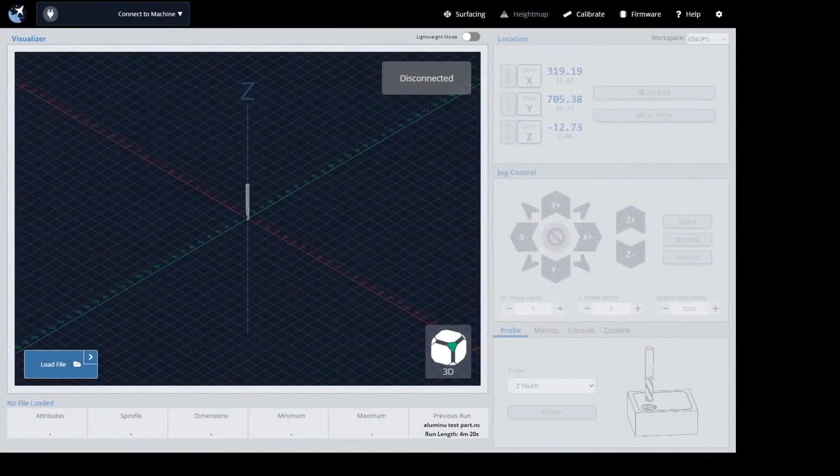So this is the most current version of gSender right now, 0.6.9. This is the full version of it you can see here. Let me just bring that to the middle.

Actually, let's see if I can get this looking how it should look. I want to make sure that I can see you guys as well. Doing a little bit of adjustment here on the fly. Yeah, so let me first switch over here, just to remind you guys before I get into this. Where's my mouse going? Okay, give me a second. I'm sorry to delay the stream, but my mouse has disappeared. I don't know where I'm clicking. Oh, there we go. Okay.

Here we are. So just to remind you guys about gSender, where you can download it, stuff like that. gSender is available on our website. We have put a lot of time and money into it, and a lot of development time. It's been under constant development for over 6 months now, but we make it available for free. If you just go to sienci.com, which is our website, you can also go into the resources here, and you'll see gSender. And if you click on that, then this page will load up for you.

And actually, thank you, Stephen, for the tip off that my links were a bit out of date, but now the links are good to go.

You can see why you might choose to use gSender. A lot of what we try to push through the development of gSender is a clean design so that it's easy to use no matter your experience, that it's also bringing additional features to the plate. And we also are working to make it run more reliably and effectively on larger files and lower powered hardware, more so than other G-code senders work, while still giving you those features. Feel free to click the drop down because we kind of keep track of the full feature list there if you're interested. There's an FAQ here if you've got some questions about it, which I think answers a lot of people's questions.

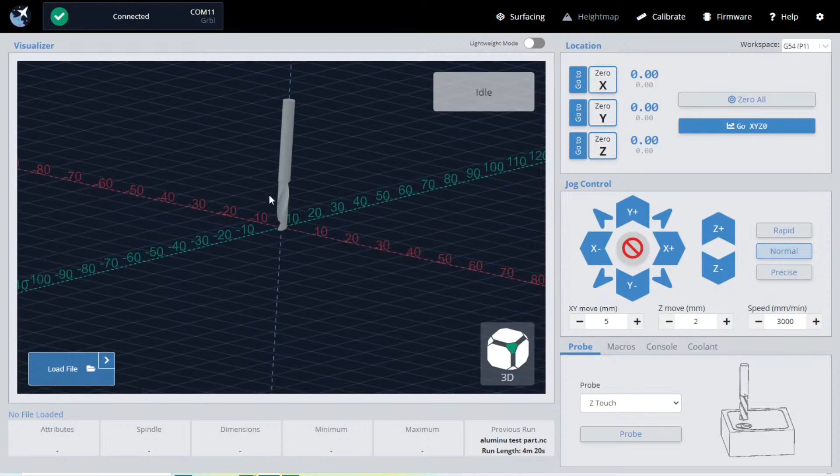Some of you might not have known this is a bit of a 3D view. You can always look at it using this little cube at the bottom. But you can also scroll in and out, left click and hold to rotate, and right click and hold to pan across.

Let's see if I've got any parts to load up. There's a lot of parts that I can load. Here's a mock part that I can load up here. That was just my recent files.

Seems like you guys can't see the load prompt, but when you click load file, you get a little window that pops up, and that allows you to navigate through to the file that you want to run.

So for instance, let's see if I can find my Starman here. I'm sure he's got to be somewhere on the computer. Oh, I guess not. No Starman.

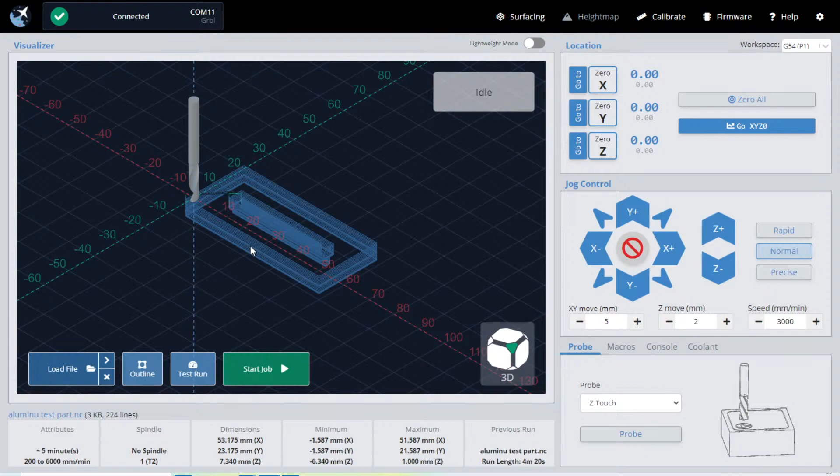Let's load up some text here. Okay, Steven, I will stop then.

And talk about the workspace dropdown. Oh, as I get to it.

Okay, I'll continue going. Colby says, neat on the fix for jogging with the arrow keys for the y-axis. Z.

Oh right, Colby, I remember that reported issue. I thought we had fixed that, but I guess I'll have to retest it because I can't remember exactly what your setup was with the shortcuts. I'll have to open back up your message and check that out again. If you haven't tried it yet on the newer version, please do. If you don't have 0.6.9, please give it a shot. I'll send you a message about it after your stream, and if it's still not working, I'll follow up with you.

Okay. So okay, I'll continue on. No other questions? I'll continue on.

You can see the code visualization happening here, and you can go and check it out if you'd like to.

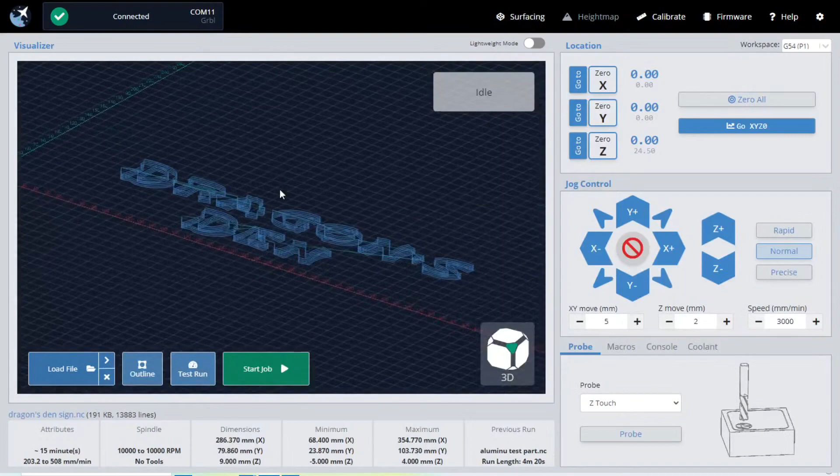Okay, and by the way guys, I'll let you in on a bit of a secret. gSender, the next version isn't going to be out for maybe 3 to 4 weeks because we're doing some more restructuring of the backend code, since we think we can make some of the processing happen even faster. I'll give you guys more updates in the weeks to come on that.

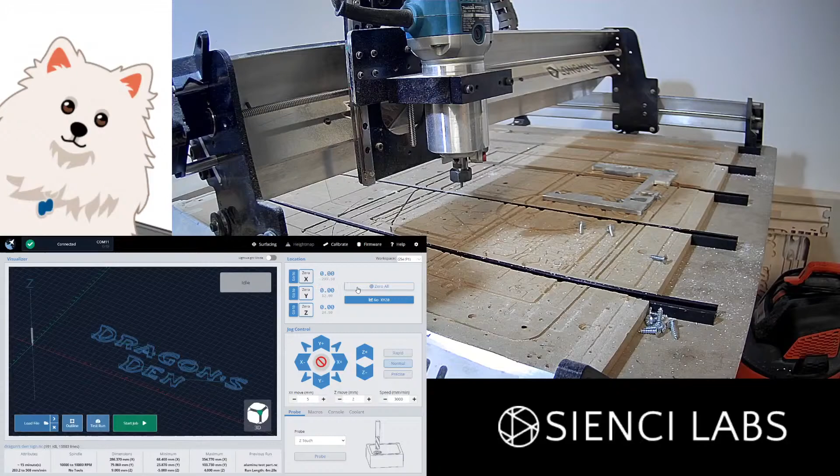In any case, I'm going to just move my machine to an appropriate spot here. Let me switch my view so that you guys can see. I'm going to be running the outline here. Just giving myself enough space to work with. And I'm just going to re-zero here and then run the outline.

So you can see that it kind of moves up, and it's going to be aiming to basically outline the entirety of the G-code. Now this is pretty handy, this is one of the new features we've installed. It's handy because it's going to show you what the extents of your cutting job is in real life.

If you've got your bit hovering over your material, you'll be able to see the view of where your cutting area is going to be. That might be handy if you need to place something more precisely, or make sure that things like clamps might be avoided. Although obviously we're not outlining every single individual letter here, it's just an overall outline. But there are some aspects where that could be very useful.

Also, you guys know that we're working on our laser module, which is soon to be released. So if you're loading up G-code jobs for the laser, that's something else that would be useful to outline with your laser before running the cutting job or the engraving job.

One thing to note is that right now the outline is being based off of the 0 point, and that's something some users have reported has kind of crashed down unexpectedly for them. So we're going to take another look at seeing if maybe we can substitute some absolute movements for relative movements so that stops happening, and that should eliminate that issue.

Oh, I just realized I should probably be full screen here so you guys can see that a little bit better.

This active signal also applies when you're actually running jobs, so that can enable you to keep tabs on if your spindle or your laser is on or off while you're running a job. It doesn't just apply to doing manual control. That's something else that's beneficial.

While I'm at it, there's also coolant control here. This applies to the coolant pin on the LongBoard, and does the same thing where it sends the command to turn on and off. Got a bit more of a delay to it, but the reason why the mist coolant button doesn't work is because Grbl doesn't normally support mist coolant. But the flood coolant is the one you want to click to turn on the coolant pin, and then you can turn it off.

Okay, so hope that was all clear enough.

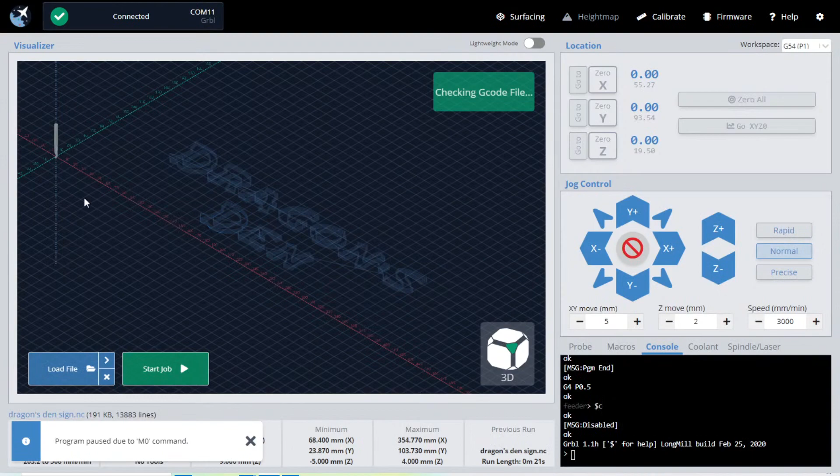I'm going to also show the test run. I'm just going to zero out again. If you run the test run, it's going to go through and show the movements of the bit. You can see the G-code running in the console here. And it looks like there's a bit of a bug here where the bit isn't moving, but that kind of just runs through the whole G-code.

The main purpose of the test run feature is to tell you if there are any issues that it's running into, and if there are issues, they'll pop up at the bottom here. When I test run this file, it came up with info that there's an M0 command that's pausing my program, and that's why I have to resume after I first run the file. This prompt here, you can just exit it to make it go away.

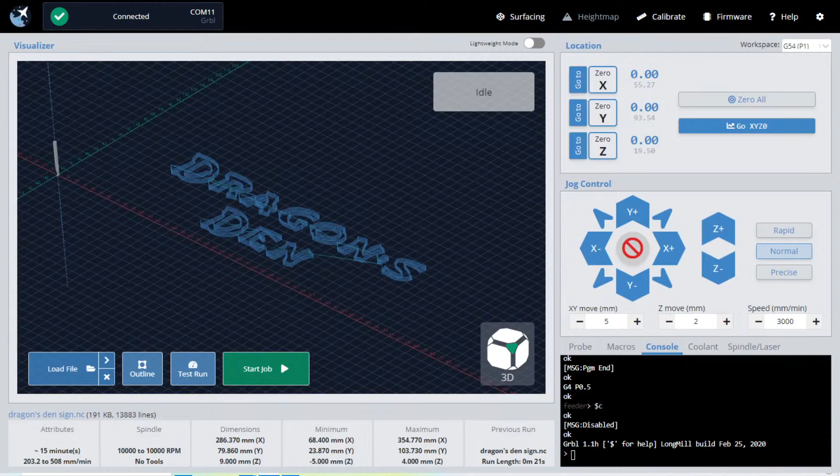Does the exclamation mark show on the UI if the tab is changed?

That's a good question. It doesn't right now show on the UI, it's only available inside of the tab. So that's a fair point actually, Stephen, that perhaps we should consider seeing if we can have a notifier displayed elsewhere so that it doesn't disappear. But as of right now, it's specific to the tab to see when it's active or not active.

The benefit of having the active indicator is beneficial when you're running a program, but the reason why it's specifically here right now is because this tabbed area is used specifically for manual control. Our assumption was that if somebody is using manual control of their spindle or laser, it's probably because they're troubleshooting and something has gone wrong and they're trying to see what it could be. So we thought it would make sense that if you're clicking laser on, you have feedback that yes, based on the software side of things, the laser should now be active. Same for the spindle, it should now tell you yes, the spindle should be active. That way, if your spindle in real life doesn't turn on, but it says it's active here, then you know there has to be an issue with something happening in between, but it's not a software issue essentially.

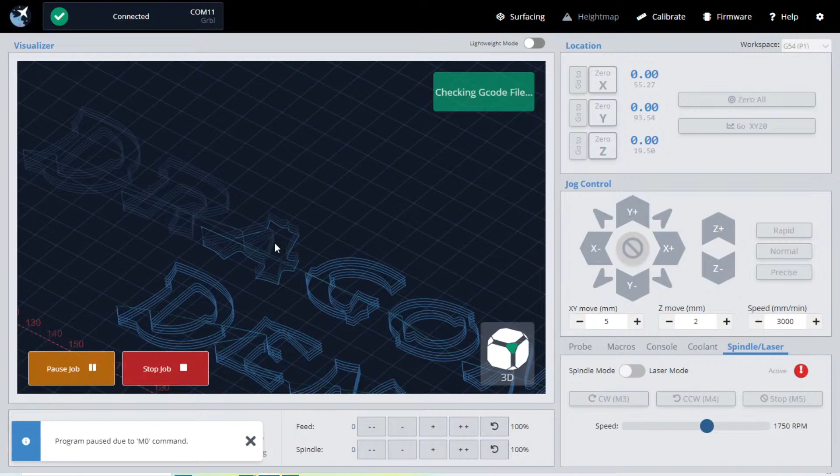Well, if they were fonts that were stacked on top of each other and you couldn't see it normally, then you would be able to see that. Because if you're running the test run, you can see how the letters slowly gray out here. So if you're watching through the test run and you see the letters gray out, but there are more letters that aren't grayed out underneath the current letters, then that would be a good indicator that there are two sets of letters on top of each other.

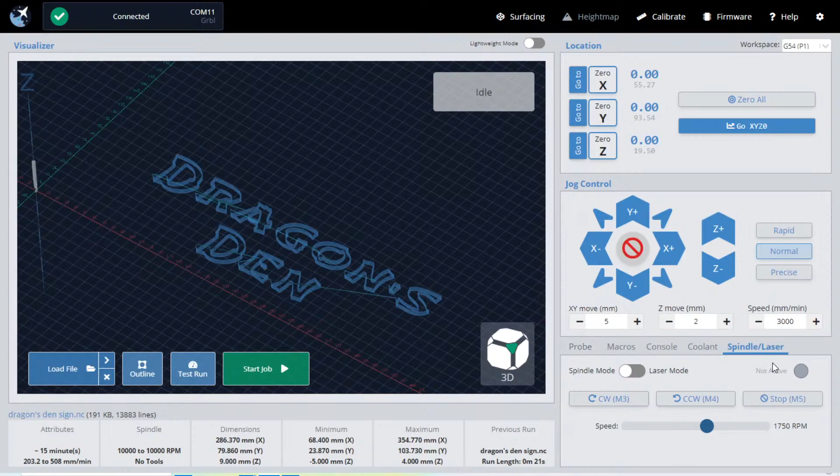Yeah, it is a bit of a safety issue. We do want to make sure people don't look into the light while they're using the laser, and your hands are clear when you're running the spindle. So it kind of has a dual purpose, I suppose. I'm pretty sure the laser module also has an LED that turns on when the laser is active, so that's kind of your caution there. But I think it's something that's valid to consider for the future.

Okay, let's see what else I want to do here. I'm not going to address every single button. I'm going to try to address things in the order of someone who's not used gSender before. I know I've tangented a little bit, but we started off by connecting, we loaded a file, we've navigated around that file, and you've seen what these buttons do here. Obviously, the start job button starts the job

as you would expect. But let's pretend, for example, that we haven't set the 0 point here yet. What would we do? Well, we've got our locations here, and it's at the 0 point. You can see we've got the jogging arrows here, as well as this little cancel. The cancel you only really need to use if you accidentally move too far a distance and you want to stop it without completing that movement. These movement keys correspond to the distance that it's going to move when you click that key. This is for the XY, and this is for the Z. And this is the speed that they're going to move at.

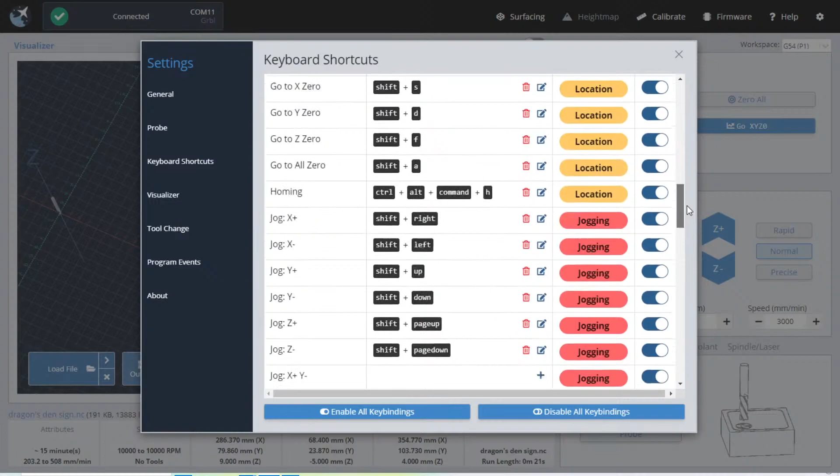You should try to make sure that most of the buttons you assign as shortcuts are ones that are going to be hard to hit accidentally. But in any case, these three buttons on the side here are what I call jogging presets. They change these values down here to preset as either rapid, which moves further distances faster, normal, which is in-between, and precise, which moves smaller distances slower. And this can be used for the jogging. You can see that I'm moving a very short distance here.

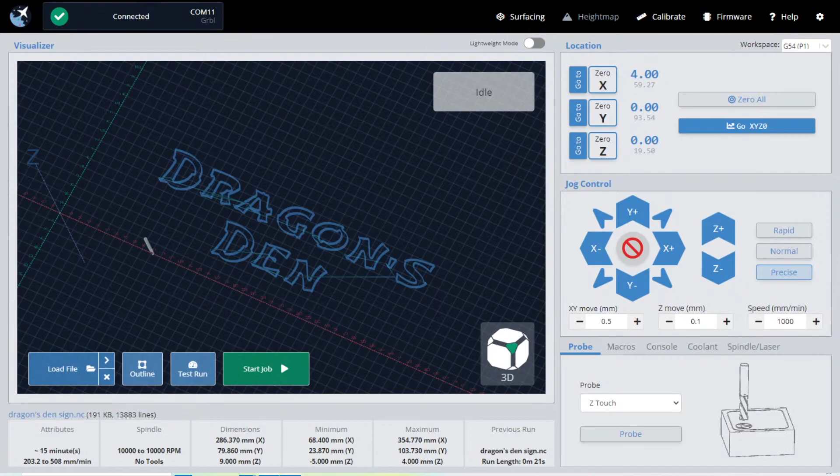Looks like there's a visualization bug, though. But you can see that I'm moving a very short distance on the actual video camera if I switch over, by just clicking these. And I can also use my keyboard as well. Now, if I was using rapid, for example, where it moves 20 millimeters, or let's say I increase this to 90, and then I move and want to stop, I can hit this cancel here to stop that movement, in case I accidentally went too far. But in that case, we're still only talking about single clicks.

The jogging in gSender is also set up for continuous jogging, where I can click and hold in any particular direction. I'll just go in normal. I can click and hold, and as soon as I let go, it'll stop moving. So I can click it, and it'll move. Oh, that's interesting. I'll mark that down as a bug, I suppose. So I can click it, and it'll move the 5 millimeters, or I can click and hold it, and it'll continuously move until I unclick. And the same happens for the keys. I can press it, and it'll move that distance, or I can press and hold it, and it'll keep moving until I let go.

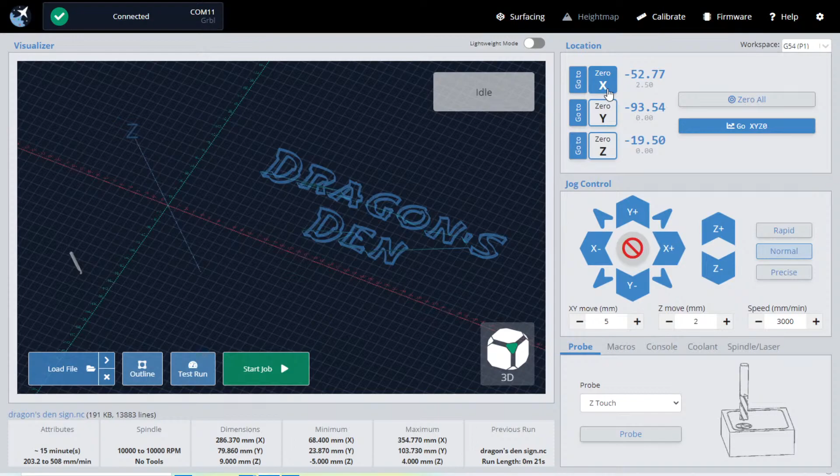I'll quickly show off some other buttons. Obviously, the bit's over here. Right now, the bit's over to the left side, and the 0 point in comparison is up and to the right a bit more. And so I can say, oh no, I don't want it to be here, I want that to actually be zeroed. So when I zero it, you can see it places it at the 0 of the X, which is along the green line.

Or if I say, yeah, I am at that position in relation to my 0, then I can just decide, hey, I want to go back to where my 0 point is, and I'll hit the go to, and it'll move back to that point.

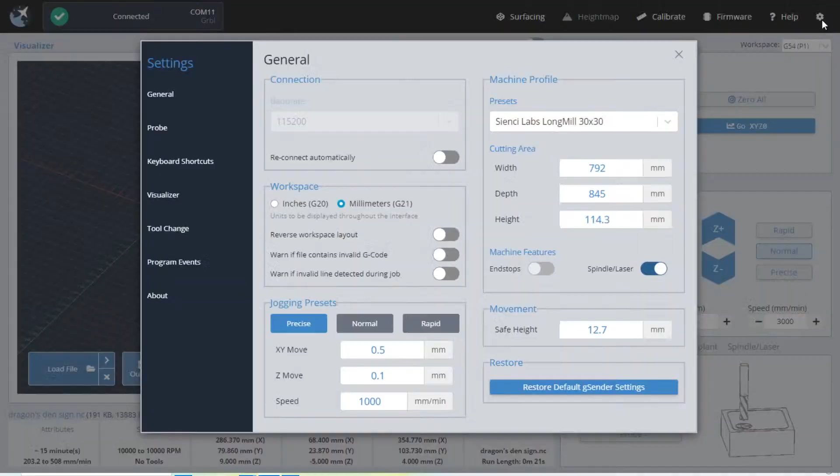Now, if you want to make sure that you're not colliding with things when you're moving around or using the go-to buttons, there's an option here for a safe height, and that safe height will allow an upwards retraction before it moves, and then a downwards retraction again, so that you don't have any collisions with anything.

That's still something that we're trying to make sure works across all the new features that we've implemented. And we might perhaps draw upon that specified safe height when the outline is run as well. So let me just catch up on the chat. Yeah, Dallas, the outline button is a new one. It's just come out with 0.6.9. Feel free to give it a try, but as I said, give yourself a lot of extra Z height to play with so that it doesn't accidentally run into anything.

As you guys know, gSender is still in active beta, and what that means is that we are working as quickly as we can to bring new features and new improvements to the program to you guys. But also in those 2-week development cycles, we're trying to do the best testing we can on our end, but there's still things that fall through the cracks. And so what I would recommend is that you guys... yeah, don't worry about it, Steven. It's something that...

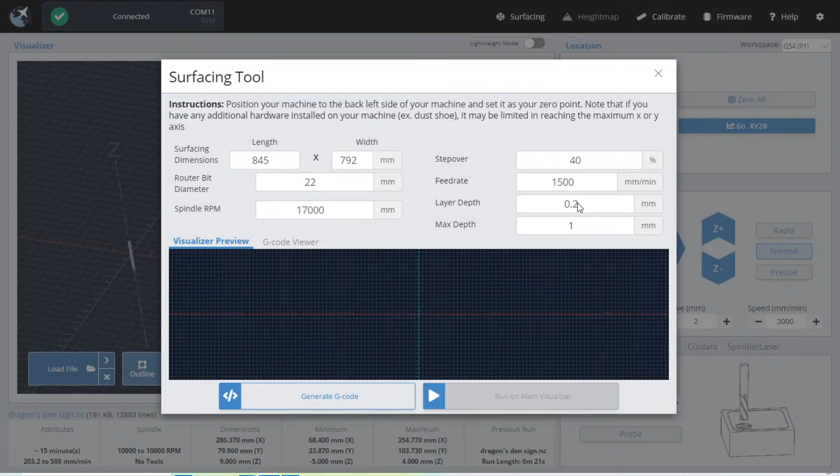Any updates on surfacing prior to... oh yeah, I'm pretty sure it was fixed. Yeah, you can now select this and put in values smaller than 1 now. That was something that was fixed with 0.6.9. So enjoy. Also, we fixed that issue where if you entered in custom values, when you exited and came back to it, they would be gone. Now they remain.

Okay. Okay, where was my train of thought here? Oh, right. I was talking about gSender being in beta.

The plan with gSender is that we're going to be continuing development of beta for likely the next 2 months. And that should allow us to get to the point where we will have the entirety of the feature set sorted out in terms of any bugs or any behavior that is unexpected. And at that point, we will be releasing gSender under version 1.0.

As soon as that happens, all of the download links and all of the other documentation will be surrounding gSender 1.0. At the same time, we will continue doing development on gSender, but separate from the 1.0, where it'll be more of a development branch. And our aim is to make it so that in the settings, you can choose to toggle between getting updates for the development branch or not. And by default, it'll be turned off.

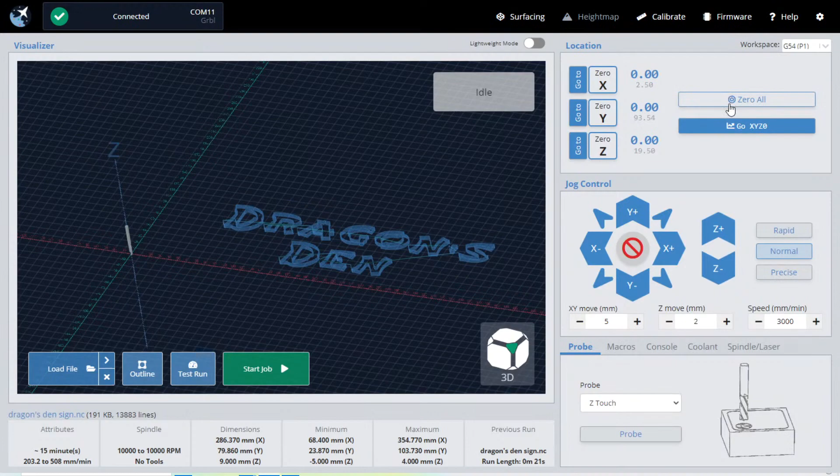Obviously, you've got the zeroing for the axes independently and the go-to for the axes independently, and then you've got the zeroing for all and the go-to for all. There's also another feature which is still a bit developmental because many people don't have limit switches for their LongMill. But you can see there's a toggle here for end stops. Basically, to enable this feature, as of right now, you actually have to go in and turn on end stops here in the firmware tool.

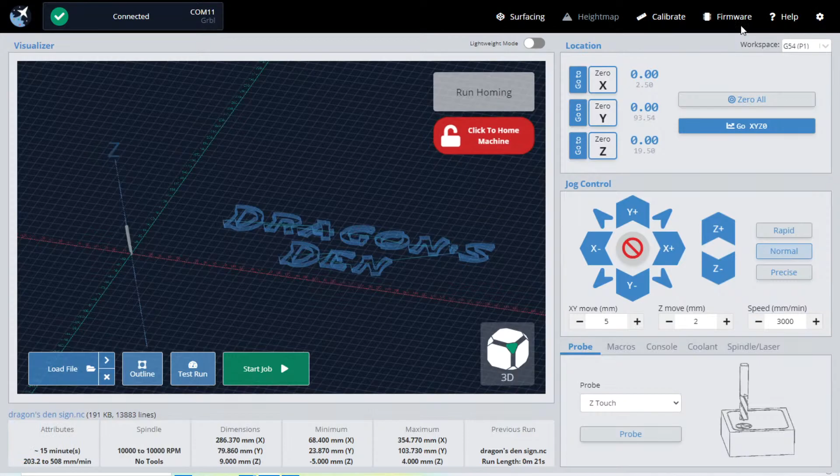And so we have to be able to turn on the homing here. And once you do that, it's going to want you to home the machine. But you'll also see that this toggle now becomes available. And once you toggle that on, it's basically going to give you some additional buttons here, including the homing button, which obviously you can send a homing command through the console as well. But also these quick location buttons.

And you guys won't have to worry about this, but by default, when you download gSender, the preset is for the LongMill 30x30. And it comes with the appropriate width, depth, height of the machine, as well as the width, depth, height of all these other machines that we have gone out and collected ourselves.

That took a long time, by the way. That took me like a whole day. Anyway,

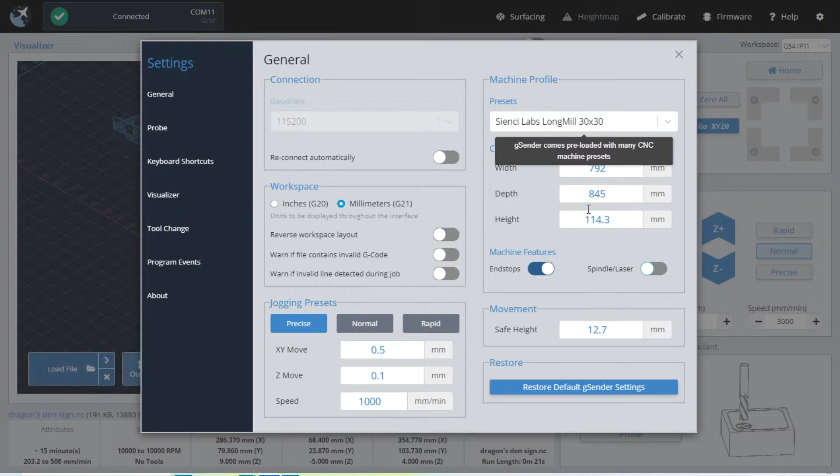it uses these values here for these buttons here. So when you go and you home the machine, which I won't because I don't have any limit switches available right now, these buttons will be made available, and they are actually quick movements to the four corners of the machine. And that's just like a bit of an extra perk of having homing switches or end stops on your machine. So I'm going to turn this off though, because I can't actually clear this.

Steven, I'd like to have both installed rather than choosing one over the other. Yeah, that's fair. Maybe we can have it so that they're both happening independently. I'll definitely consider that in the future. It's something that we haven't actually started working on yet, being able to choose between the two, and so if we find that not having to choose between the two is actually easier to implement, then perhaps we'll just go down that route instead.

So, Steven, I'll address quickly the workspace that you were talking about. Some of you might not know this, but when you're using the LongMill or any CNC machine for that matter, you can set up multiple workspaces, also known as work coordinate systems. And essentially, these different work coordinate systems are basically different 0 points that you've set. So, for instance, you'll notice that right now in gray, these numbers are different than the 0 numbers. And it's because these gray numbers are actually the quote-unquote machine home.

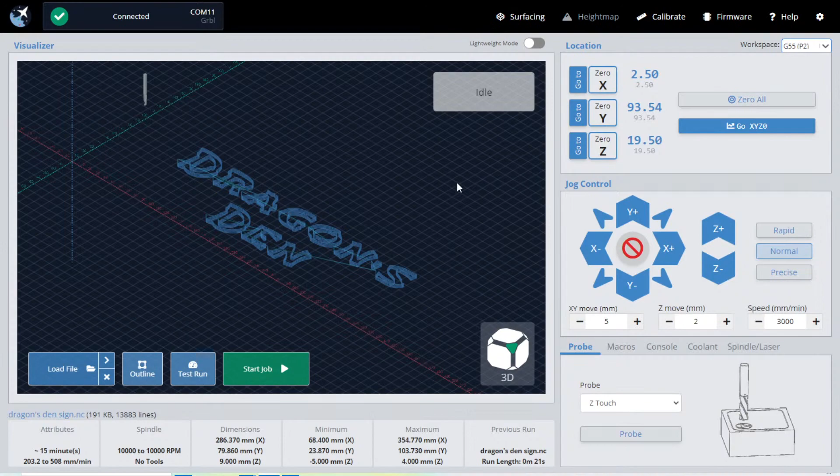I'm at the workspace G54 0, 0, 0. Now, some of you might not know this, but anytime you're using basically any G-code sender, by default, you're working inside the G54 workspace. You're not working within the machine workspace. And so if you want, you can always just switch to another workspace. And you'll see here that in my G55 workspace, because I haven't altered the 0, its 0 point is still at the machine 0 point.

Though obviously, if I wanted to, I could say, oh, this is my 0 point here, right? But now that I've moved it and set my 0 point, if I now toggle back to G54, you'll notice that in G54, the bit is offset by that movement that I just made. You guys see that? And if I go to G56, it'll also be the machine 0 back up here.

And so you can see how this would be useful if you're wanting to keep track of multiple zeros at once. If you have, for example, a jig or some sort of locating mechanism in the back corner of your machine that you use specifically for running a particular job.

Or if, for instance, you're trying to batch out a large quantity of products and you need to set zeros in multiple locations on multiple jigs, stuff like that, because you don't want to be running one job and then jogging over, setting a new 0, running that job, jogging over, setting another 0, running that job. If you're kind of tiling the same job over and over again, but your G code only has one cut version of it.

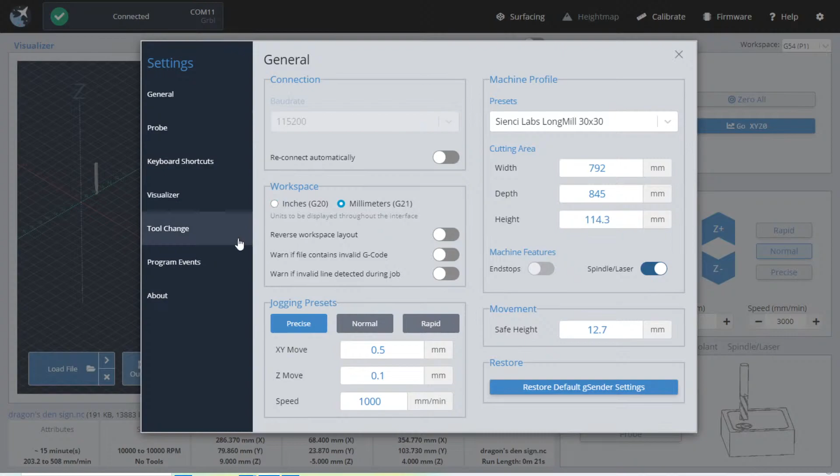Like that they're customizable. There's always more space in the settings, and as of right now they're kind of locked in place, but my vision for those 4 buttons was that in the future they definitely would be customizable, so that people can have 4 locations they can quick travel to. Both versions of software installed on the computer? Yeah, I think that would be perfectly fine to do, David.

Can you run 2 LongMills at the same time? No, you cannot do that. Well, to be fair, I actually haven't tried this, James. Opening up 2 versions of gSender at the same time, connecting to different machines and running 2 different jobs. Actually, let me grab a USB cable really quick here.

Let's see. Even so, I might not recommend it, because having a constant stream through the USB of your computer to another machine and receiving signals back brings up more possible issues like lag or missing something along the way. But I actually have another machine here beside me. Let me see if I can do this or not. Okay. So I've got my two machines plugged in here. This one should still be able to go along now. Okay.

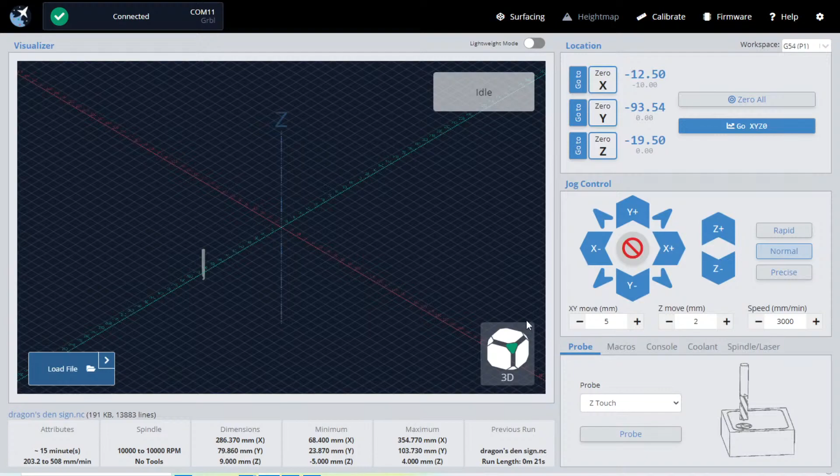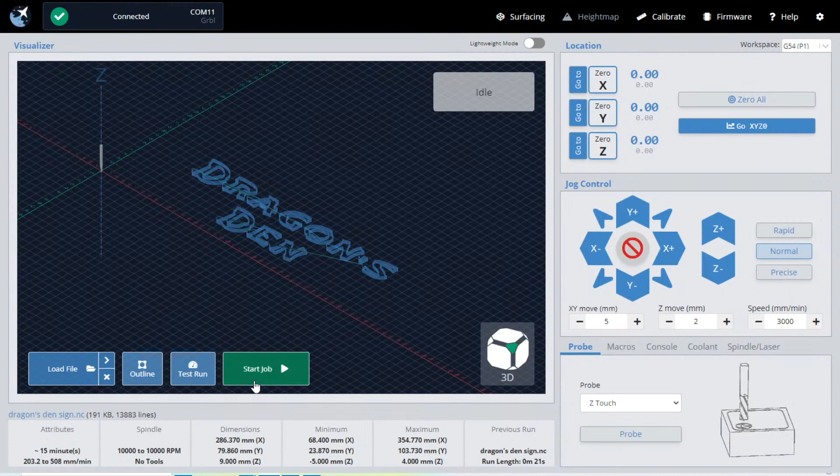But I'm just going to try out something here. I'm not able to load two instances of gSender, but I'm going to see if I can run the LongMill with gSender while I also run the other. Let's bring this to a safe location. Clear that. Okay. Yeah, I am connected to two machines simultaneously right now.

But James, to be fair, we haven't done a whole bunch of testing on running two machines simultaneously. It's not something many LongMill users do. I know Don on our Facebook group has run two LongMills for quite a while now. I'd be curious what his setup is. If you want, send him a message on the Facebook group and ask him what his setup is, and he can let you know. Anyway, I'll stop this job now.

It seems like multi-machine communication is possible, but as I also said, you're looking at talking back and forth. Think about when you're communicating with your CNC machine. Think about it in the sense that the machine is quite dumb. It's accepting a communication line through the cable from the other computer. And so the computer I'm on right now is having to do that talking live back and forth. It's like a conversation to the machine, right?

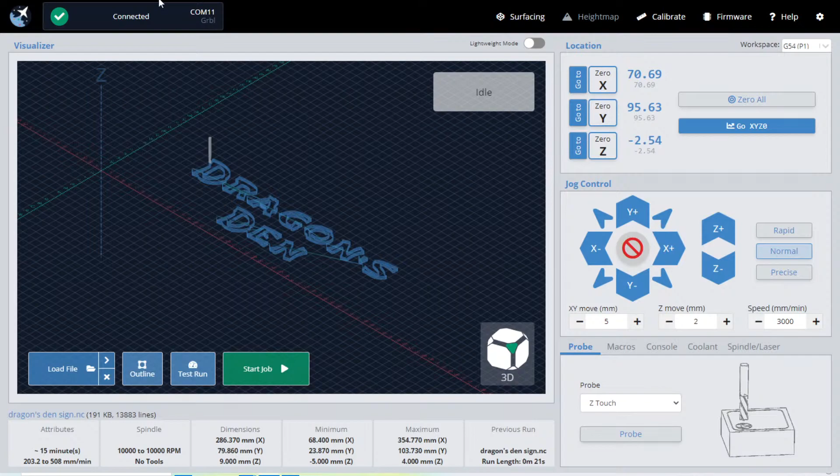Oh, there was the tool change spot question. Oh right, I totally had missed that. Rick: is there a way to set the spot to do a tool change? So right now, the way tool changing is set up, if you guys don't know what I'm talking about, you go to the settings and you go to this tool change area, and you can basically tell it I either want to ignore tool changes, pause when I see one, or insert code when I see one. And the purpose of inserting the code is to allow you to automatically do stuff on a tool change command so that you can actually process a tool change and then continue going on with your code from there.

If you don't have homing set up, it's going to be very difficult for you to be able to specify a tool change location. You will need to have homing set up to do that. If I'm honest, tool changing in general, doing it automatically via this tool change section, will most likely require homing to be set up. And the reason being is that you can imagine there would be a little bit more difficulty. First of all, because you have to specify a tool change location, which, since you don't have homing set up, all of your movement is happening relative to your job, which makes it much more difficult.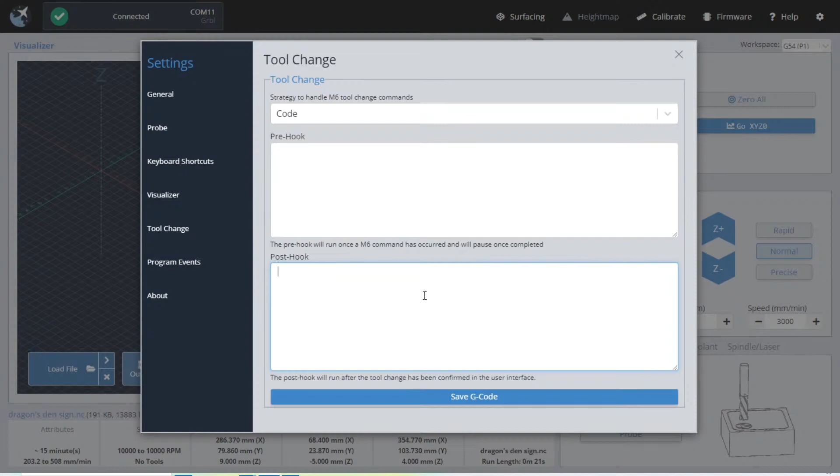Right, so there's kind of two aspects to it. There's obviously the aspect of when you begin the tool change, you can move your bit up and out of the way of the job area, and then stop and allow for time to perform the tool change. But then after you've performed the tool change, you now need to reset your 0 point.

And that can only be done via a probe. So you'd have to program in a probing to happen in the post hook. But if you don't have a set point for initiating the probe via having limit switches, then it will have to be in relation to your job, which is okay if you're set up for that beforehand. But it'll just require a little bit more thought on your end.

Does that make sense, you guys? I can clarify on that if you'd like me to.

Zachary Schnell, any idea on a homing sequence? Yeah, you can already do a homing sequence if you have limit switches. I went over this a bit earlier. You basically go into the firmware, go down into homing cycle enable, turn that on, go into the settings, turn on end stops, and now you can either run the homing sequence here or here. But you need limit switches on your machine before you can do that. If I click this, it's just going to time out because there's no limit switches on my machine.

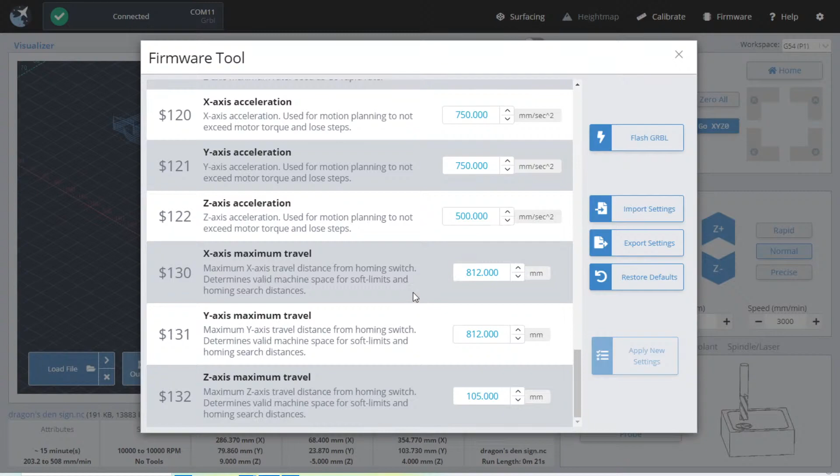Soft limits is basically going to use your maximum travel numbers and make sure that from the homing point, it won't move more than 812, 812, and 105. Otherwise, it'll give you an alarm. And hard limits requires actually limit switches on both ends of your axis, so one at the minimum point and one at the maximum point. And it'll look for a triggering of the maximum limit switch and give you a warning when that happens.

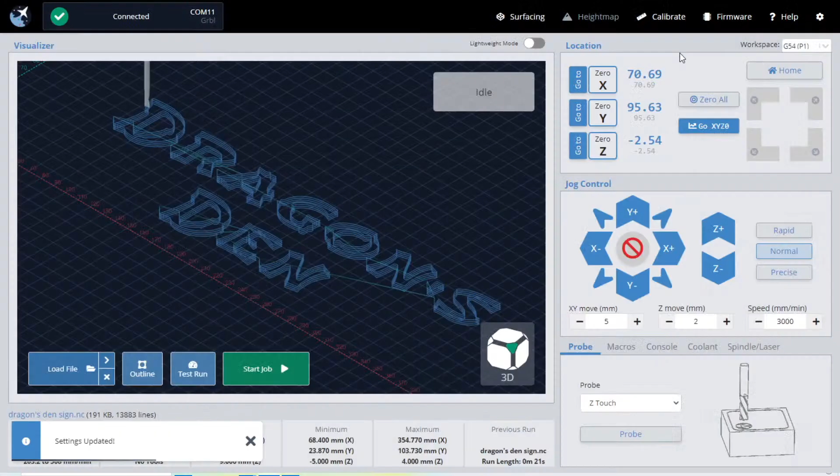You'd be able to turn off my end stops here. I'm getting some bug going on here.

Makes sense to me, but I'm using it. Yeah, so anyone who's used to using a more pre-built machine will kind of find the idea of optional limit switches confusing.

The fact of the matter is that obviously here at Sienci Labs, we make a push to make the machines as accessible as possible, and one aspect of that is price. In addition to that, me and Andy have been running our machine. Any things that are available to you are available to us. It's not like we're not selling you limit switches, but then we're using limit switches here in the office when we make stuff or projects or whatever. Andy and I literally haven't used limit switches on our machine to this date, and the company has existed for like 5 years, and that's how long we've been using machines for. So when I tell you limit switches are optional, they really are optional.

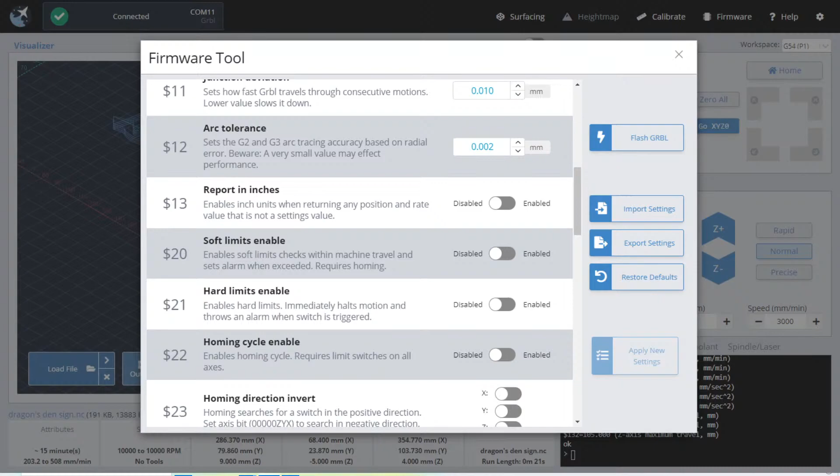So Zachary, you're saying that your toolpath screen went blank. I don't know if I can address right now whether that's a you problem or an us problem. If you mean that everything looked normal except for this one boxed area here was completely black, that isn't an issue that I've seen before. What I might recommend is, if it's possible you're having the same problem as Zach...

Okay, this is the first time I'm hearing about it, guys. I have seen instances of the entire program freezing on people, but I've never seen just the visualization area go black. So I would really appreciate it if you guys could follow up by submitting feedback.

I'll go back over to the browser here. If you guys could, go to the gSender page and click feedback, or if you have gSender open itself, you can click the question mark help button, and that will also take you to the installation or resources area, and go to this problem/bugs tab to submit feedback.

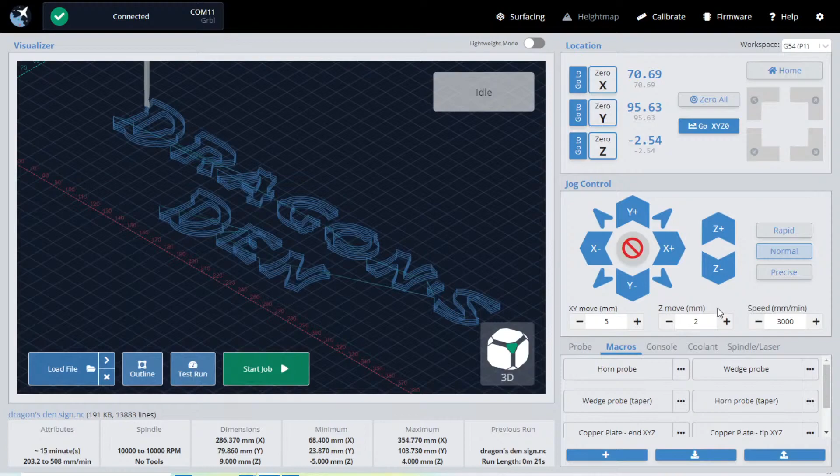That's interesting, Jeff. It's been a while since I've troubleshooted Grbl devices, if I'm honest with you. Obviously in gSender that isn't happening, you can see if I do my movements, I'm getting okay there. But it could be possible that your baud rate is incorrect.

I can't change the baud rate right now, let me disconnect so I can show you. Normally there's different selectable baud rates here, and you need to make sure when you're communicating with your machine that the baud rate is set correctly so that you're getting proper streaming of the information. Obviously for the LongMill, it's set up by default, so nobody has to worry about it.

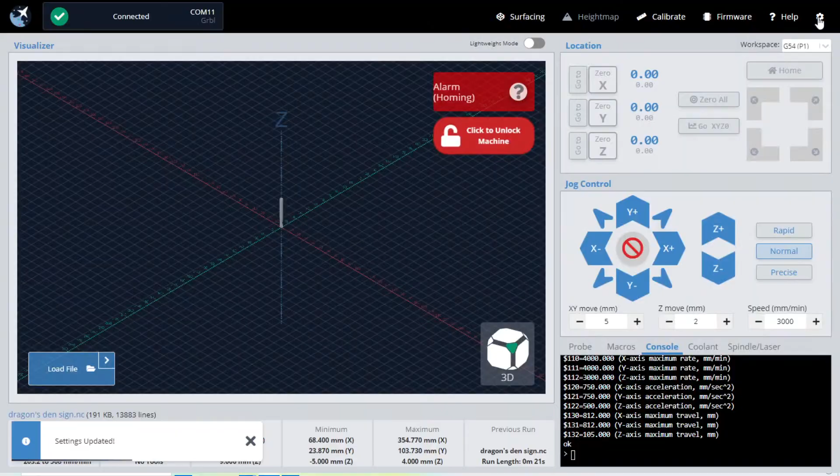Oh, it still says that I've got, hold on, let me turn this off.

What voltage is the M8 and M9 switching? The voltage that it's switching, let me switch back here, you can see the close-up here. It's on this coolant pin, the coolant ground combination. It's sending out 5 volts to the IoT relay here and causing it to switch on and off.

So the nice thing is that that's controlled with the M8 or the M9. Additionally, you can do it manually, if you don't want to do it fully automatically, through this coolant tab here.

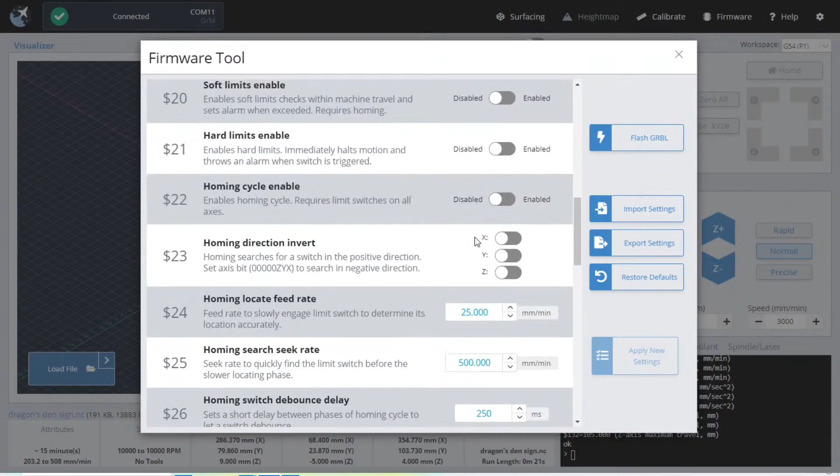Hold on, I need to sort out why this is doing this right now. $22.

Interesting. I like that while I'm doing this stuff, I'm also finding bugs alongside you guys. This is pretty fun.

Okay, let's sort it out. Yeah, maybe because I have two devices, I'm not sure.

Digital, aka David, yes, I talked about outline earlier on, so you should be able to go back earlier and find the answer to your questions. I actually talked quite a bit about it, and also some things you want to watch out for since it's only been just recently released.

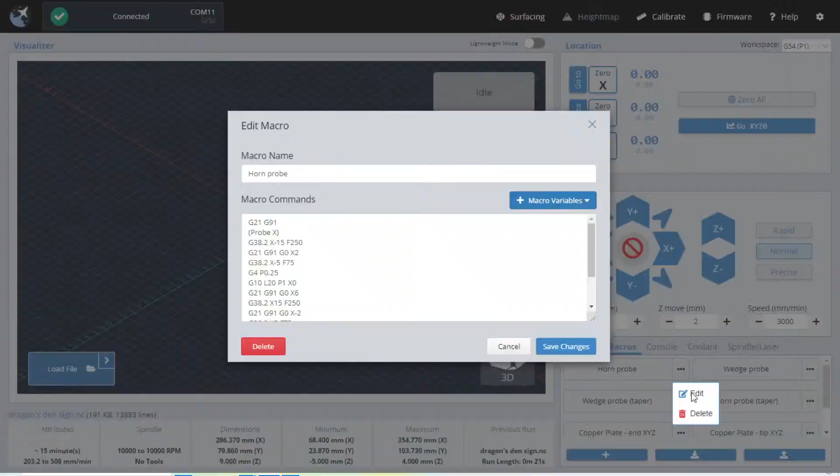For instance, if I'm trying to make a probing command, if I click the dots here, I can edit it and delete it. So if I edit it, you can see here that I've got a variable in here. And what this variable is allowing me to do is to basically grab the current X position, divide it by 2, add a certain amount to it, and set that as my new X position. And that's something that you can't do easily with pure G-code, and you can do much more easily using the macro variables.

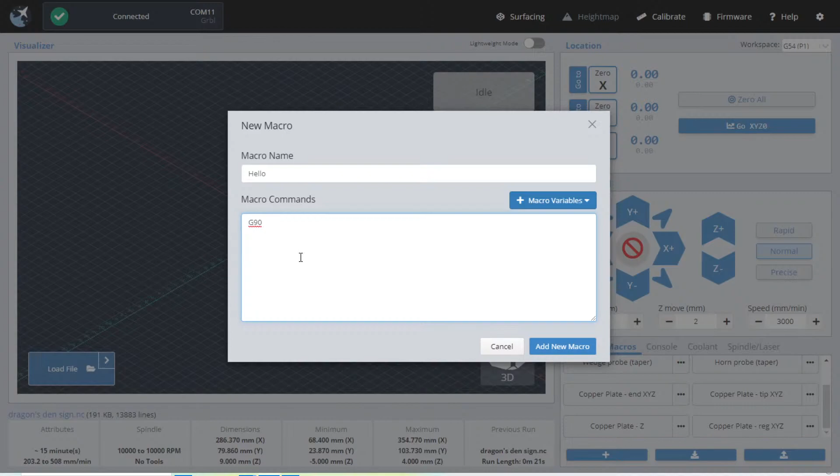So yeah, you can make those changes and save them, do whatever. If you click this button here, it'll run it. I don't want to run any of these. Let's say I make a macro command that moves to the left, I don't know, 10 millimeters max. Moves to the right. Oh, right. I forgot to define a feed rate. I should probably tell it how fast it needs to move.

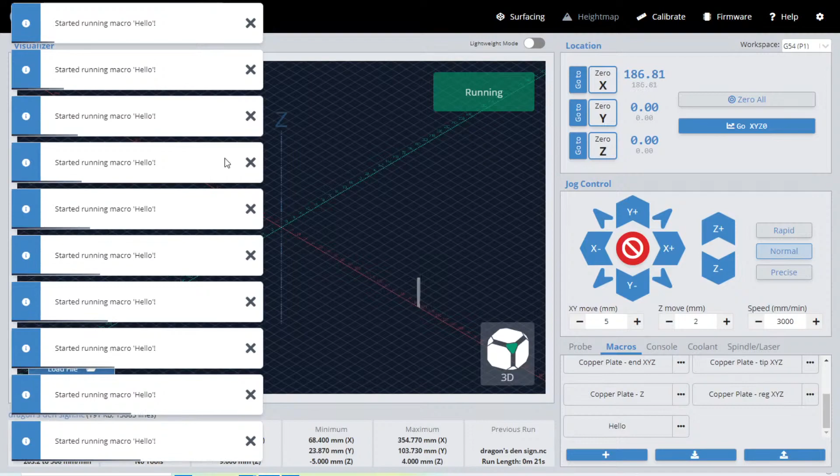In case you're wondering, I just went over to the console here, which gives you kind of the raw output. And it told me, hey, you haven't told me the feed rate. There we go. Now it moved. I need to, let me do this in G91. Now, anytime you click this, it'll move to the right. And you can make this amazing wall of text here. And you can cancel it if you realize you want to abort, like what Steven brought up earlier.

And the last thing about macros is that we've made it so that you can assign shortcuts to them. So if you scroll all the way to the bottom of the keyboard shortcuts, you can see I can create a shortcut for the macros in the macro section. You need to make sure you turn it on, and you can assign a short key to it. So let's say I had Control 5. Actually, let's run the hello one, Control 5. And then I leave that. Now if I press Control 5,

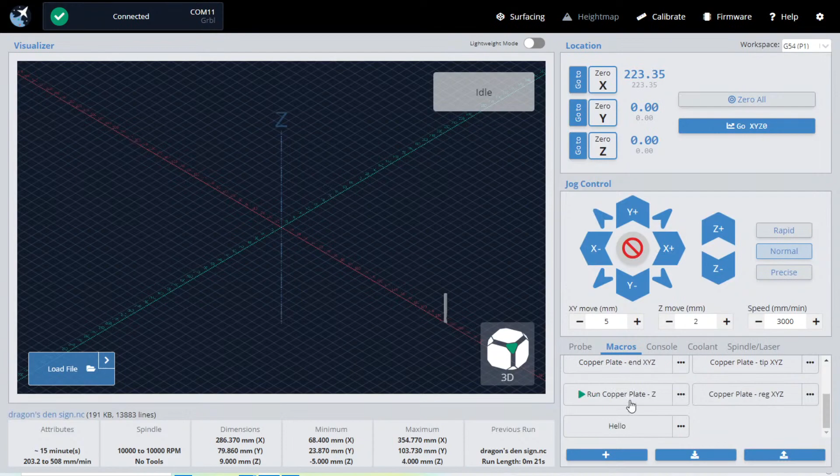the macro seems to run for longer than the macro did. Yeah, it's just because I clicked it over and over again. So it's actually just running the macro over and over again in quick succession. Let me choose another macro shortcut here. Maybe Shift D, or yeah, Control D. Control D.

Oh, I think I found another bug, guys. Okay, well, that's interesting. It might just be the specific key combination that I'm using. This has been a very productive session. Let's try Shift G. All right. I suppose something went wrong on the newest update, so I'll have to take a look back at that. Oh, wait, did I turn it on? Hold on. Oh, it's not even turned on. Oh, there we go. I didn't turn the macro on.

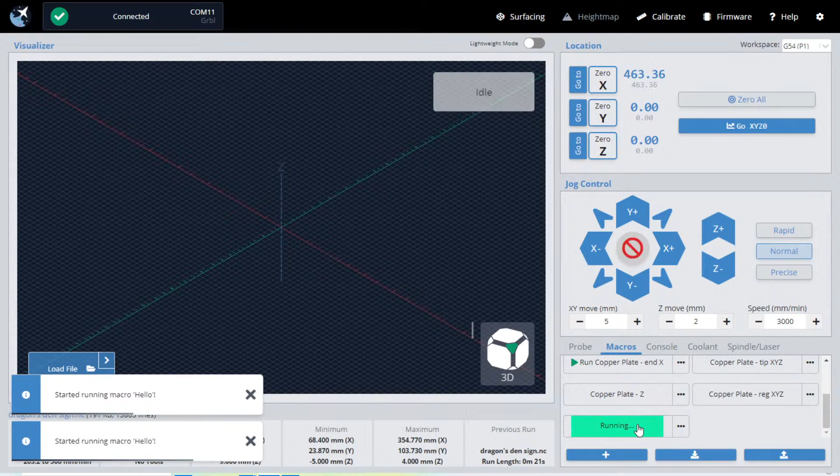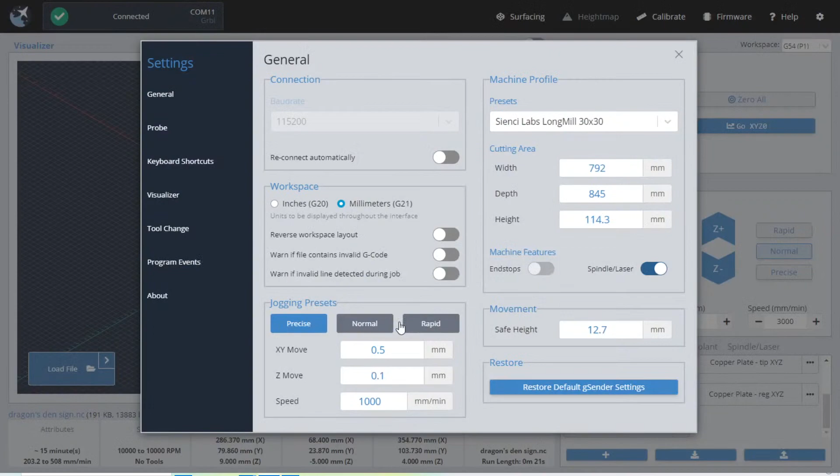I think the bug that I was encountering was that bug, Steven, that you mentioned before, where when you run the macro and it's in focus, then pressing any key will cause it to run again. That I suppose we haven't addressed yet. But the actual issue is that I didn't turn the macro on, which just goes to show that even the guy that has basically run the entire gSender project can still forget these things. So don't feel bad if you forget these things as well. That's the real takeaway.

By the way, all of the menus that get popped up, you don't necessarily have to click X to leave them. You can also just click outside of them. For all of you super users out there, that might make things run a bit faster for you. Just a heads up.

Steven, you have to let me know if I answered all of your questions regarding macro stuff, or if you feel like there's more that I missed. Wow, thank you, Richard. I really appreciate that. I hope you're able to use it for all of your CNCing needs.

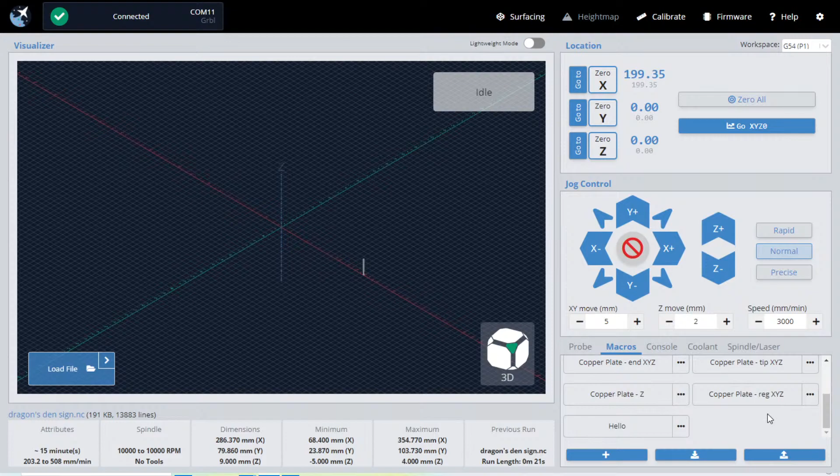Okay, well, while I'm waiting for Steven to get back to me here, I'm going to see if there's anything else. I haven't done probing yet, so perhaps I can do that for you guys now. Oh yeah, there's that bug again, Jav. Wild. All right, I'm going to switch my view here so you guys can see the camera over by the machine.

Oh, hold on. Is the web camera still working here? I might have unplugged it accidentally.

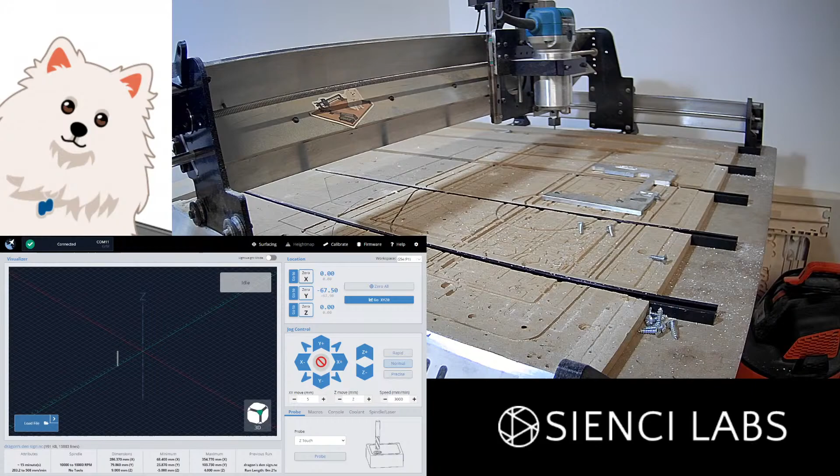Oh no. Oh, you're all good, Steven. Glad to hear. I think I accidentally ruined the webcam. Oh, never mind. We got it back. Oh, okay, we got it back.

Okay, this is good. All right, guys, you've been asking to see probing, so you're not going to be able to hear me very much. I'm just going to go over there quickly and set it up, and then I'll come back and explain what I'm going to do. Sound good? So you'll be quiet for a bit. Just talk amongst yourselves.

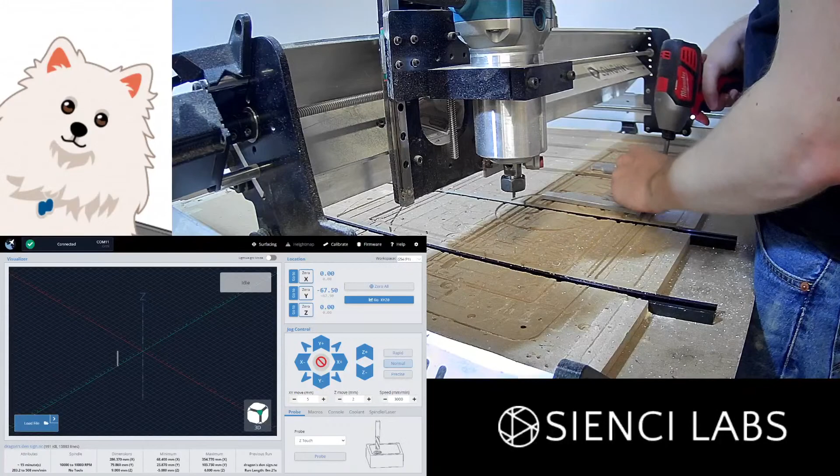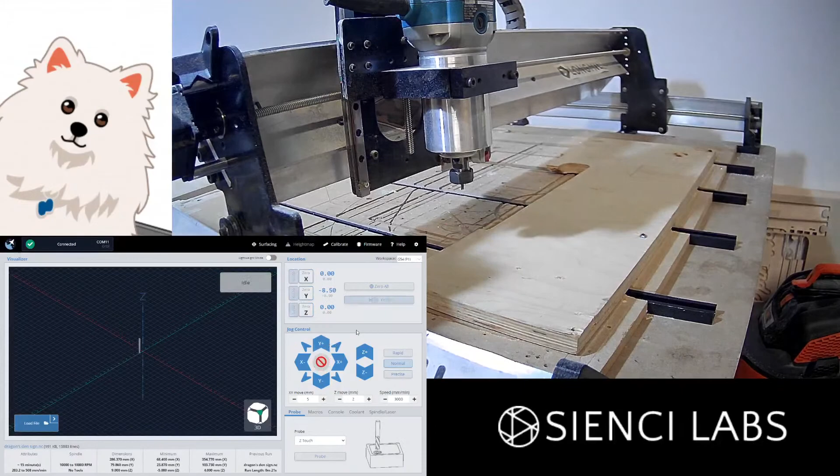Hello? Okay. Yeah, how about them Habs? Am I right?

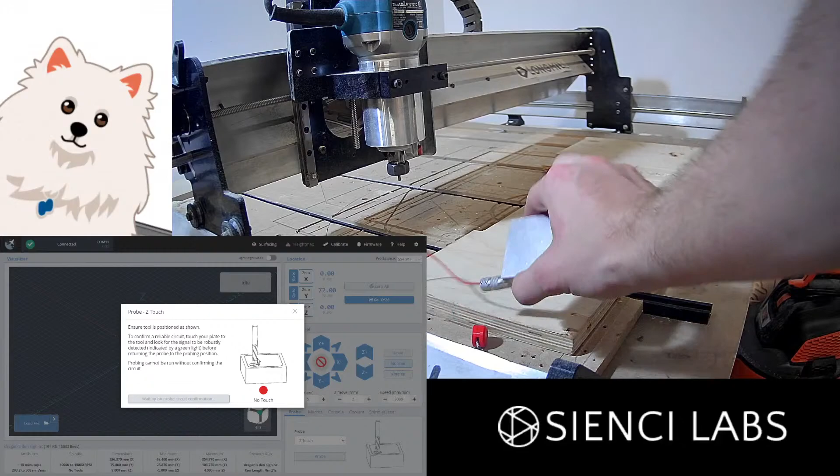we're going to get this window here. Basically, it's kind of like a check before you actually run the probe that, first of all, your probe looks like it's in this position as pictured, which is the bit is above the circle. Obviously mine isn't right now. But the other one is the connectivity, which is I should be able to touch these two together and you can see it turns green. So that's really important that there's a solid connection there so I don't lose any bits. Let me back out of here so that I can finish setting this up properly.

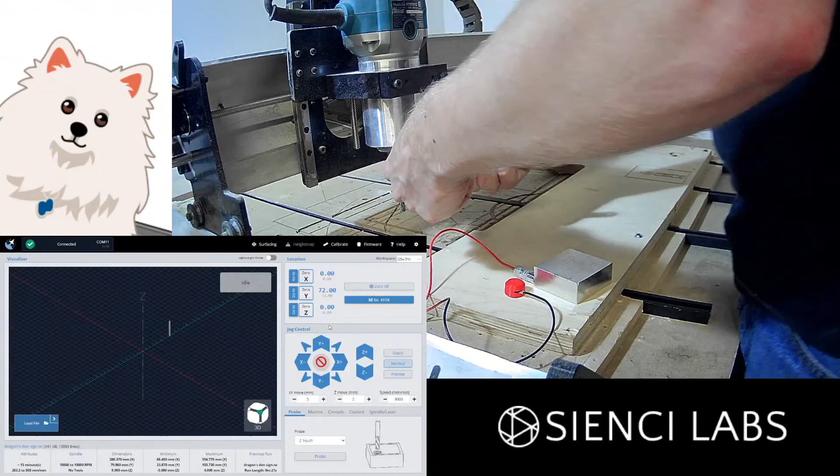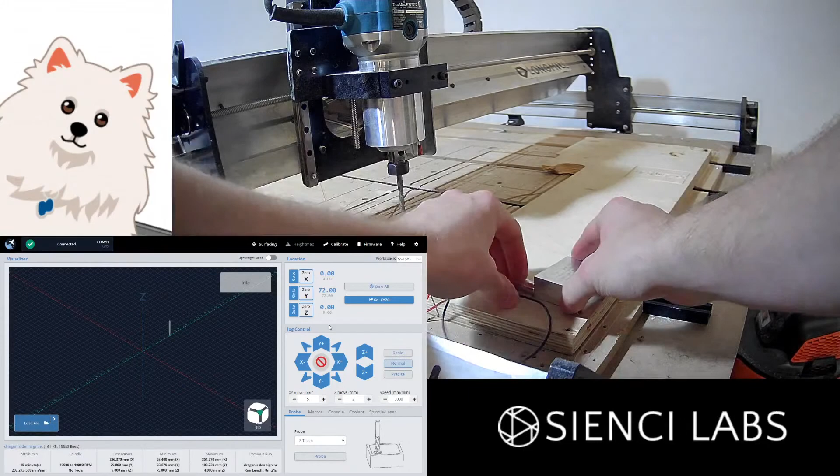Just putting in the bigger collet adapter. Now, feel free to use the red button on the Makita for general loosening. Yeah, so guys, I was just saying, in case you couldn't hear me, feel free to use the red button on the Makita to do very light hand tightening and hand loosening of the collet nut. But if you're ever doing any substantial tightening, remember to use your wrenches. This red button spot isn't meant for full tightening. I know in some past videos we might have shown this before, but don't do that. It's just a bad idea.

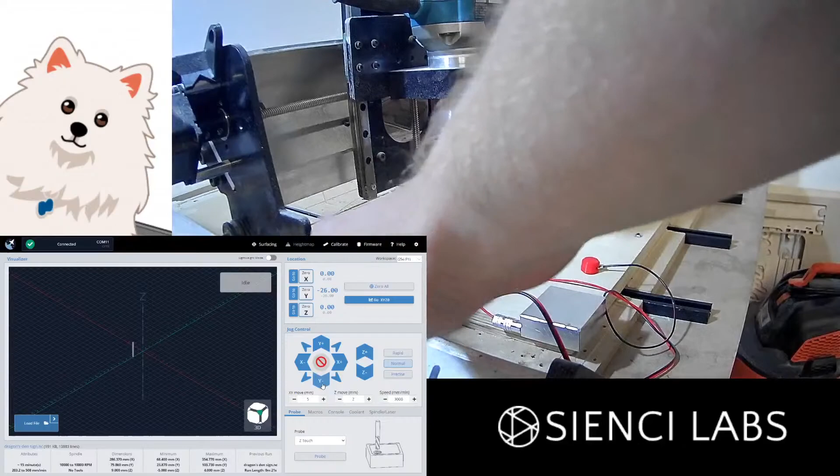So I'm just gonna jog the machine over here. Also, when you're doing this, be mindful of the cable here. You don't want to run over it, guys. We are trying to make things easier for you so that you don't have to think about as many things. But I can't stop you from placing this wire right under your V wheel and squishing it. That's asking too much of me at that point. I need you guys to be able to complete a reasonable amount of independent thinking.

No, I'm not calling anyone out or anything, you know. Everyone makes mistakes. If you do run it over, then post a picture. I'd love to see it.

So you can see now I've gotten... let me bring the light over here a little bit better. So you can see now I've gotten the bit close-ish, but it's still not above the circle like it should be. This material's kind of warped. Kind of annoying. So normally I like moving around in normal mode, but I'm going to switch over to precise. This will allow me to have a bit more granular control to get over top of the bit here. And to me, that now looks like it's about above.

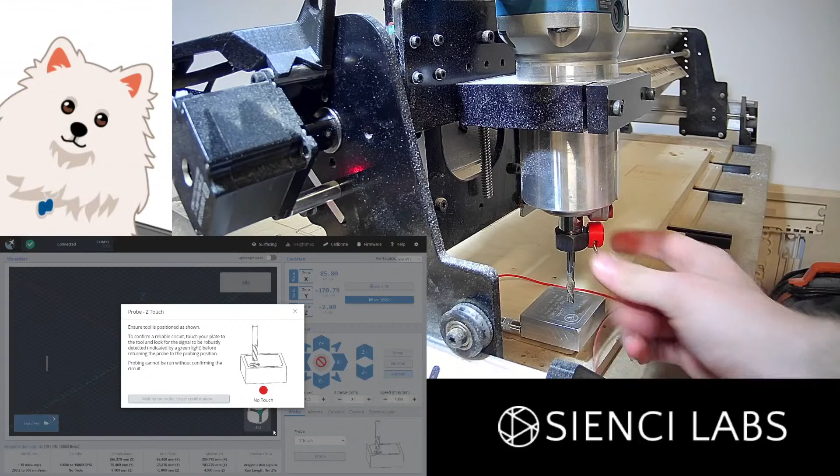So I'm going to reopen the probe menu here. I'm going to do the touch. And oh, look, Mr. Chris forgot to attach Mr. Magnet onto Mr. Nut. Okay, let's try again. Touch it up. Okay, look, we're getting connection here. So this is important because if you don't check this first, you're gonna go and just collide, and you could break a bit.

Now, bear in mind, I'm not forcing you into my ecosystem or anything like that. You can go to the settings, go to probe, and there's a little toggle here called probe connectivity test. You can disable this, and that would allow you to not have to touch the probe to the bit every time. It would just let you go straight through if you would like to. But by default, it's turned on because we want you guys to not have those issues. Even myself, everyone makes mistakes. I haven't opened up these probe settings yet, but you can do some other adjustment of the size of your touch plate and the settings of how the probing happens.

You can put in your different tools here if you'd like. The tools aren't necessary because, well, if I do another type of touching, you can see there's the tool selection here. You don't have to make a new tool if you don't want to. You can also type one in if you'd like to, and it'll use that as well. So up to you, really.

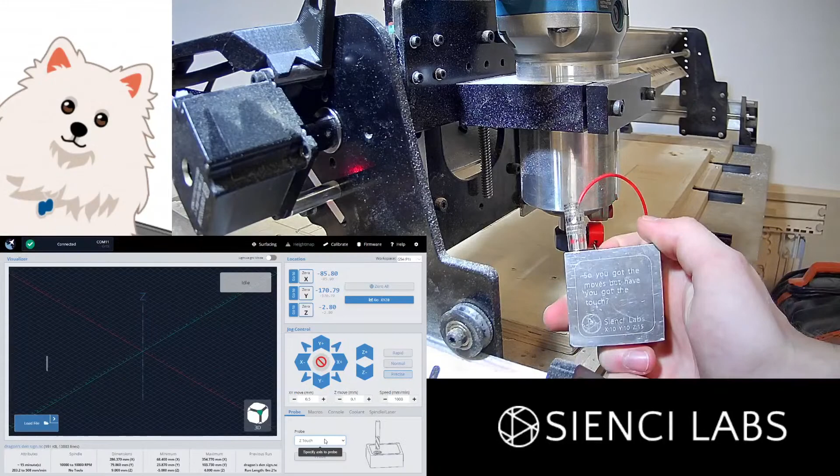In any case, so let's do a quick Z touch here. Let me show you first a Z touch that'll fail. And I'll tell you why it's going to fail. The reason why is because I'm going to start too high up. I'm going to start the probe. And look at that, I've got an alarm here. And the reason why is because we don't want it to look for too long.

If it looks for too long and something's messing up, then maybe it's breaking your bit, maybe it's plunging into material that you don't want it to plunge into. Who knows what's going on? So it's a safety thing. So you do need to make sure that you're bringing the bit reasonably close to the plate before starting a touch in all three directions, which is why we've also got the circle that you have to start at. Otherwise, you will have an error out that happens. So if you get the error, you can always click here on the question mark and it'll tell you why you got the error. And you can always click here to unlock it.

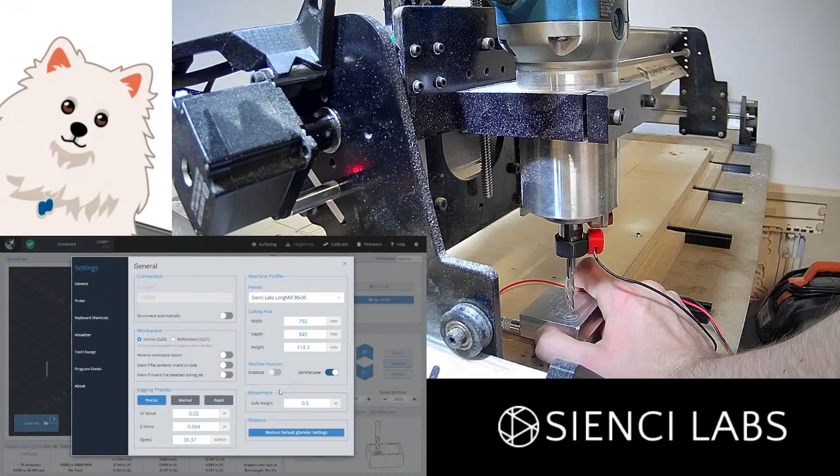Is there an inches mode? Yeah, of course there's an inches mode. You go to the settings here and you switch it to inches. And now everything is in inches, except for this is still in millimeters. That's supposed to have been changed. But even over here, this is in inches per minute. Inches, inches, inches. Even all the file settings, like details, are in inches. So I don't have the file loaded right now. There we go.

But you guys know, I like using millimeters personally. I mean, I'm Canadian, so we're kind of allowed to use inches or millimeters. It's up to us. You know, when you're born, you're handed two different index cards, and you have to choose which one you like the most. And I happen to choose millimeters, which is kind of handy because a lot of engineering conversion stuff, the metric system is a bit simpler, no conversions necessary, you know. So

Yeah, so now I'm going to run a Z touch, and this time it will work because I've got the bit close enough. Now it's just going to touch off the surface once, back off, touch off the surface again, and now we're good to go. And you can see now it set my Z0 to 19. The reason it's set to 19 is because the plate is 15 millimeters tall, and the touch-off distance is 4 millimeters. So 19 is where it should be at. And now if I click go to 0, you guys won't be able to see, but it is at the 0 point, like it is at the surface of the material.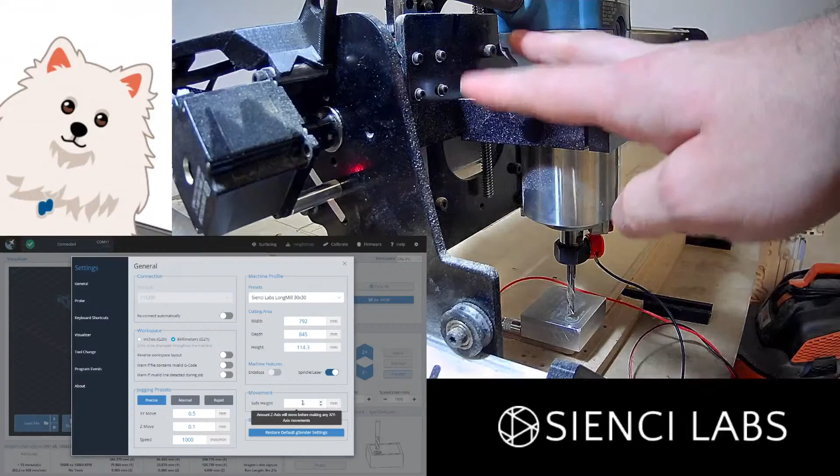The reason why that failed and it plunged into the material there is because after it finished probing, and I said go to XYZ 0, when you click that, or any of these go-tos, it's going to move to the safe height first before it makes a movement, and then come back down. And right now, I'm right near the limit of my Z travel, and my safe height was quite a bit. So when it moved to that safe height, it actually collided with the top of the Z axis. Thought it moved even further, and then when it came back down, since it thought it moved further up, it ended up moving further down instead.

Okay. My bad. Let's do this again. It's good for you to see even myself making mistakes, right? Can be flipped to the Z. Yeah, sure. I'll show Jeff. I'll show you how to do the flip.

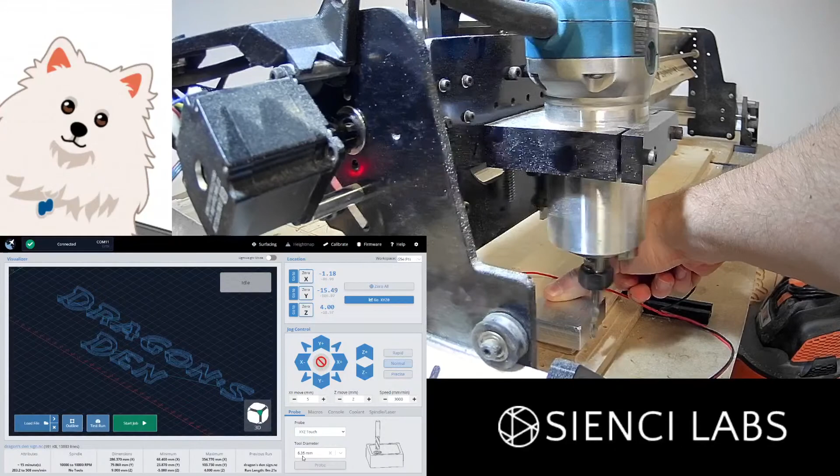Default diameter 0. I suppose that's something I hadn't thought about before. Oh, I actually know. Oh, interesting. Well, this is a bug here. The Z0 shouldn't be that high up. Let me move this down a little bit.

There we go. Well, that probably answers the question of, I have seen a couple people saying that it plunges into their stock. I'm suspicious now that what's happening is you've got a safe height that's a bit too tall, and it's maxing out the Z. So, then again, your router shouldn't be this deep in the router mount. Usually it should be higher up. But in any case, hey, Jeff, I'll show you how to do the flip Z.

Nicholas, why is your default tool diameter 0? Your default should just be whatever you have previously selected. Let me try here. If I disconnect and reconnect. Yeah, it's just what I previously selected. So if you've never selected it before, it'll probably be 0. You know, we could probably make it so that there is a default value if you'd like.

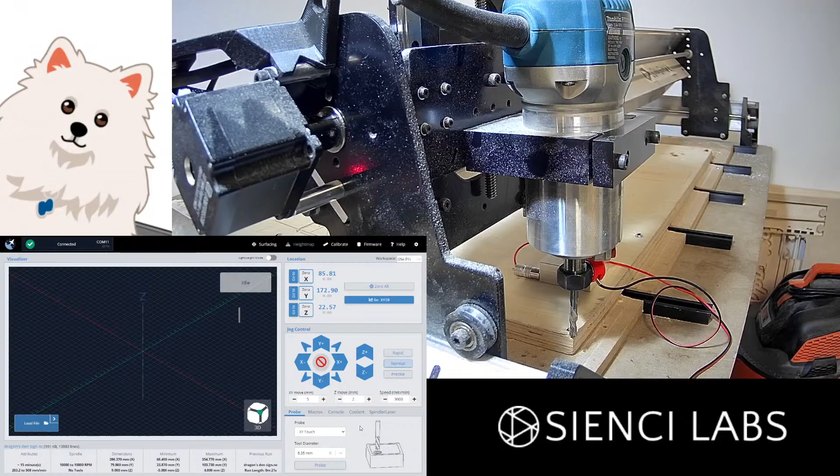Jeff, let me show you how to flip it and touch it off the stock. So, off the spoil board. Well, you can do either. It doesn't matter either way. So if I do a Z touch here, I'll raise it up. I'll just move it diagonally over this way and raise it up a bit more. Make sure you don't have your wire underneath your plate so you get an accurate measurement here. Hit probe. I touch them together. Start the probe.

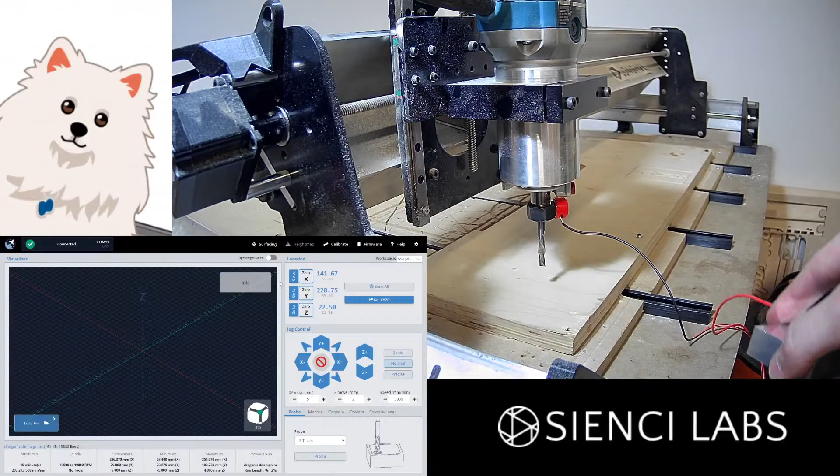And then I'm not going to go to my total 0. I'm just going to go to my Z0. There you go. Touching the surface right there. Barely not touching the surface. And if I want to do it on the spoil board, let's see if I can reach over there. Oh, I'm right at the limit of travel here, but it looks like I might be able to get away with it. Yeah. Let's go again. This is for you, Jeff.

And I'll go back to my Z0 here. There we go. Right above the spoil board now. You can do it wherever you'd like to. Just flip over the plate. I know the way that the graphic looks, it makes it look like you can only do it the one way. Maybe we can squeeze both graphics in there, so you can recognize that you can do it both ways. But yeah, if you think about it in terms of the geometry, this is the 15 millimeter thickness. So it doesn't matter if it's this way or this way. You're going to get the same thickness. So it doesn't matter.

Was there anything else I haven't addressed? Mike, it works fine, but I can't take a large file. Yeah, Mike, that's something that we're hoping. I was mentioning earlier on the stream, we usually release a new version of gSender every 2 weeks. The next one isn't going to be out for another 3 to 4 weeks because we're taking a lot of extra time to try to introduce some optimizations so that it runs better on larger files and lower power computers.

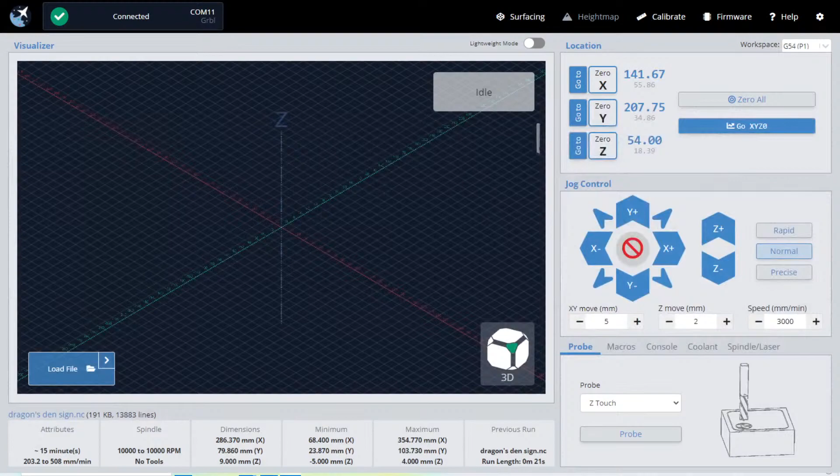Can a video game controller be connected for moving the machine around? That's something that we're working on, Jeff. Right now, you can actually install a third-party app, there's a lot of them out there. I think one of them is called JoyToKey, but there are many that exist out there. And basically, that will turn joystick

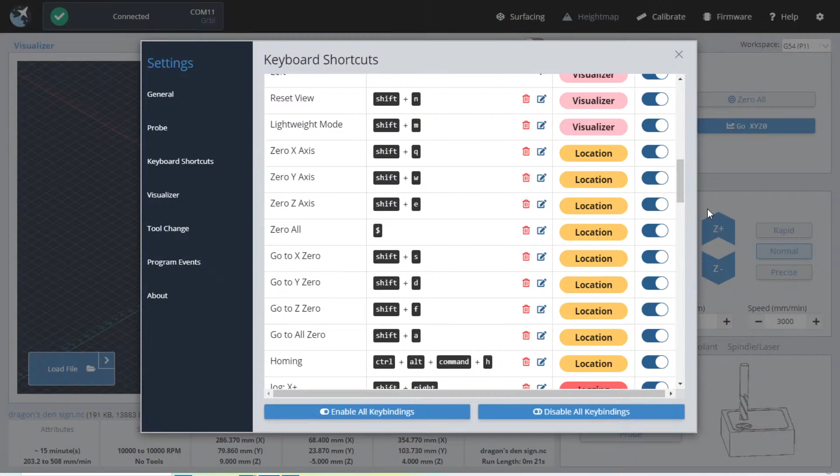movements into keyboard presses. And then in gSender, you can go to the settings here and set up your keyboard shortcuts so that the different keyboard presses do different things. So that's kind of a roundabout way right now of getting your joystick working in gSender. But we are actually working on joystick support directly through gSender, so you don't have to install a third-party app as well.

Ty, you're saying after the update you can't run big files anymore? That's interesting. I wouldn't have expected that to happen. If you wouldn't mind elaborating a little bit more on when you're saying you can't run big files, is it freezing? Is it not even loading in the first place? What exactly is the behavior there?

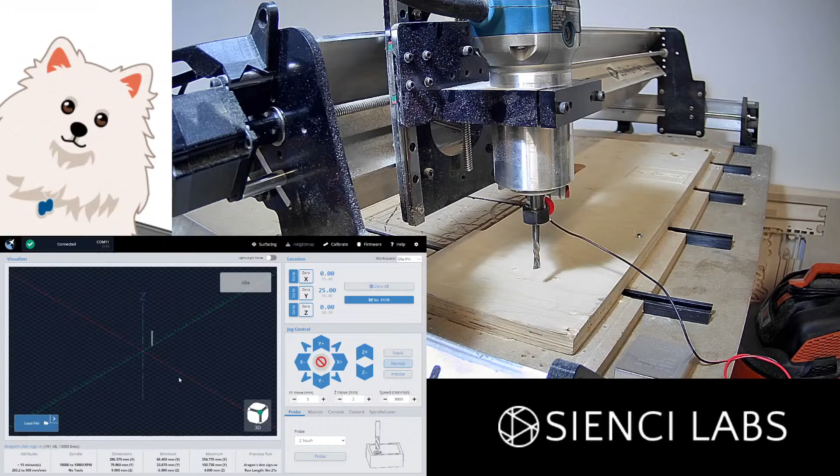The black stuff that you see on the rails, some people think it's part of the wheel coming off, but it's actually dust that's being compressed onto the aluminum and turning black because it's just being compressed. So you can use just a brush or a plastic scraper. You'll want to check for loose fasteners, and you'll want to lubricate the linear guides.

Some people mention lubricating the lead screws with a dry lubricant. That's something that we've never seen as necessary because the interface is a metal screw on a plastic nut. So lubrication shouldn't be necessary. But in some instances, people report the nuts squealing. If you have the nut squealing and it's annoying you, you can put dry lubricant on it if you would like to, but it's not necessary.

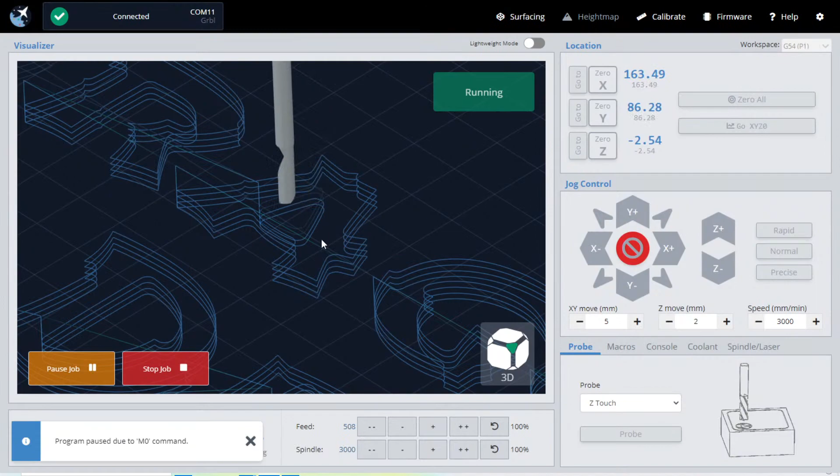I think I've done pretty well for running my first live stream, but it's hard to sometimes remember that you guys aren't seeing what I'm seeing.

Yeah, as I was saying, Andy and I started CNC Labs because we're really passionate about it, and we're really passionate about making it accessible to everyone else, right? So that happens not just through the design of the machine, but also through offering good resources and support. And also, I like teaching people too, so I'm happy to be here with you guys, able to show you around.

When will the LaserBeam be ready, will there be a video that explains moving from CNC to laser for newbies? I think there definitely should be. As far as I'm concerned, that is what we have planned.

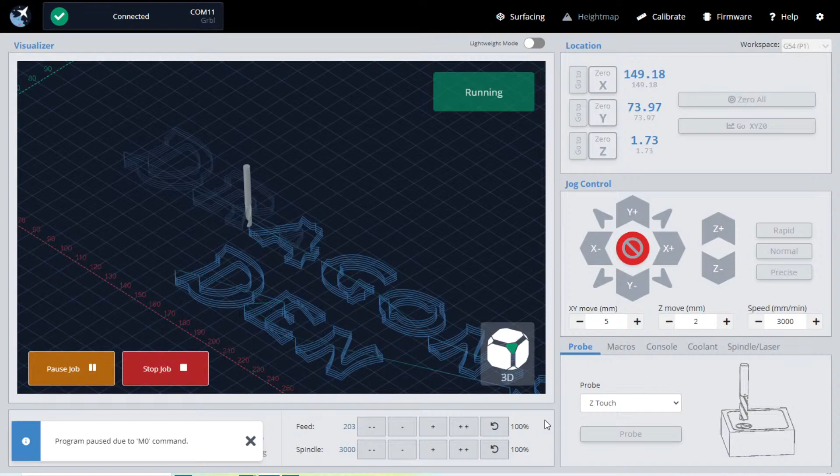Because we want to make sure that we're not just releasing a product and then leaving you guys to figure it out on your own. We want to make sure that you guys know how to make laser projects, make pictures online and convert them, and put the laser on your machine and control it and all of that stuff. And I can tell you right now that we're already implementing a lot of features into gSender so that when the LaserBeam is released, it'll be fully supported by gSender as well.

The program paused due to an M0 command being stuck. There's a couple programs that do this. I'll start at the beginning again, and you'll see when I start the job, it has the M0 at the start. This is something that me and the development team have gone back and forth on.

This file was made in Carbide Create, and I don't know why they put M0 commands at the start. I think it's for their own machines and their own ecosystem. But we can't make gSender ignore M0 commands, because an M0 command in G-code language is literally pause the program. That's what the command means.

The problem arises because we have to ask ourselves, are we going to make gSender ignore commands that tell the machine to stop? There are a lot of valid circumstances where you'd want to pause the program. So are we going to ignore that? The answer we've come to for the time being is no, because it's a pause command. You have to pause.

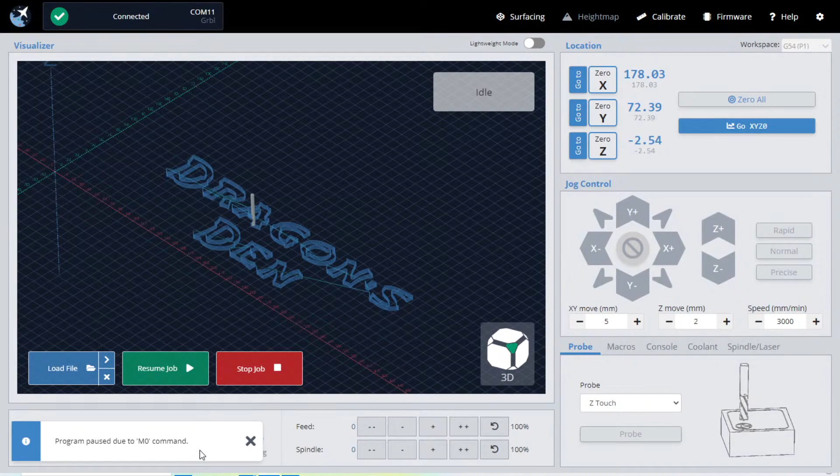So the way we're handling that now is you get a little notification that says your program's paused because there's an M0 command. Perhaps we can add a quip on the end saying click resume job if you'd like to keep going, because that's what you have to do. You have to click resume job, and the program starts from there.

By the way, you can get rid of this at any point. You can click the X here and it'll go away. The reason it stays there permanently is because if it pops up only temporarily and then goes away, you'll come back to your machine and wonder why it's sitting there not doing anything.

Is it okay? It stops, but the banner stays and the button on the LongBoard does not work. You have to use the... Oh, so Nicholas, there's actually a bug right now when you click stop on the longboard versus stop in the user interface.

And I know what that bug is, and that's something we are going to try to fix in the near future. But for the time being, if you were to start it and then stop it, yeah, this does still stay there. You'll have to exit it out manually. It's not something that'll go away automatically.

Can't it go away when you hit continue? Maybe we could make it do that. I suppose that might be possible. I'll talk to the guys about that. We'll see if that's something that's difficult to implement or straightforward. But that's a fair point, we could try making it go away.